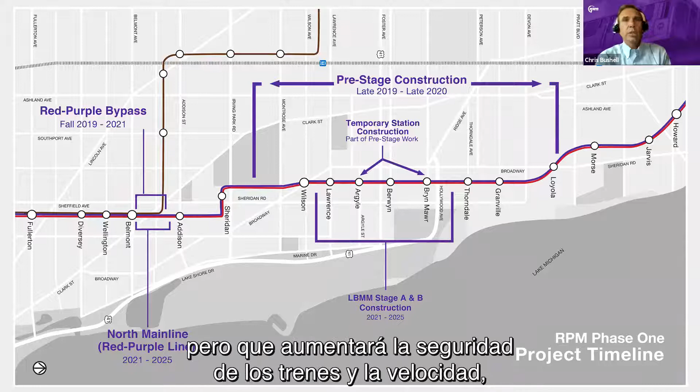Next slide please. So just a map. Most of you folks have seen this already, you understand what it is. Besides those two elements and the stuff that goes around them, the bypass obviously comes with some additional replacement of the elevated structure. In addition to that and the work I talked about in Lawrence to Bryn Mawr, it's also a new signaling system, which a lot of you will never see, except it will keep your trains safer and faster, and otherwise be a critical part of modernizing the service into the future.

Next, please. So, outreach, design, and construction. Outreach has started, it really started 10 years ago and continued through public meetings where we were looking for the neighborhood's vision, how the neighborhood was anticipating reacting to new stations and what was important in those. It continued through a National Environmental Policy Act, a NEPA study, and finally a full funding grant agreement. So the outreach has gone on for a long time. In the short term, it's really reaching out to businesses, reaching out to communities, providing the best information we can on construction.

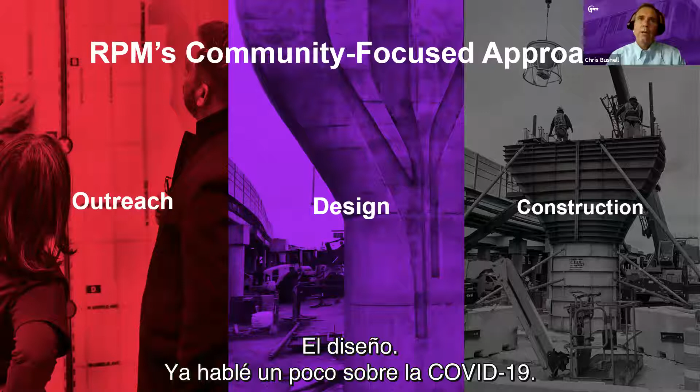Design, I talked a little bit about COVID. Design in this project is occurring all over North America. We have used video conferencing instead of people traveling to the city, which has some advantages and disadvantages, but we've been able to keep it going.

In terms of public space design, we haven't just considered the structural weights and the train and how many times the train has to go over and the various forces associated with that. We've also thought about the community as we've been building these bridges, what kind of rooms and spaces, public spaces, are created under our bridges and around it. So we have tried to give that consideration and provide fewer columns, better sight lines with those columns, safer for cars and pedestrians going through, as well as new lighting. So various amenities that you would expect to see in your city, we've tried to deliver on those as well.

Construction. We are building a very big project here, and it is right in the middle of your neighborhood. That said, we've tried to take into consideration and limited the contractor in terms of what they could take for roadways, closing those roadways. They can't close all of them at once. We work very closely with the aldermen to make sure that you can get to your homes, and where you can't, you have suitable alternative service. We make sure that when we close an alley, that you have garbage pickup. So we have considered the impacts of that construction, not just to keep it on schedule and on budget, but also to minimize the impacts to the community and the riding public.

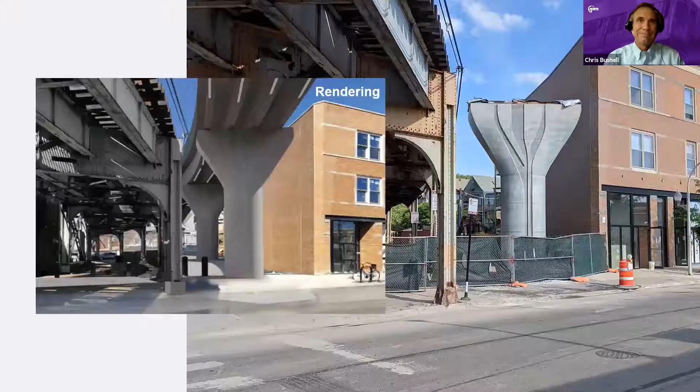Next slide, please. So this is just a couple of slides to show that we've delivered on some of the promises we made in earlier renderings. Those of you that are in the neighborhood, of course, see what the columns look like. You'll understand there's a bridge that will ultimately be on top of that—that's really the bypass. But just comparing those to what we showed earlier, we're trying to deliver on those promises.

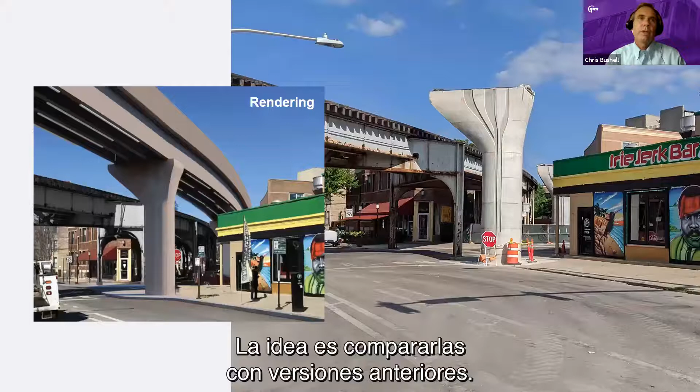Next. Similar issue here, just trying to compare it to earlier visions. You see a little bit of refinement one to the other, but fundamentally we're endeavoring to deliver on earlier promises. Next slide, please.

I talked about fewer columns. I talked about lighting, better sight lines. All of these are improvements that we considered in a room like this. Instead of just having tracks under there with nothing else, we tried to improve the lighting and add features where we could, where it made sense to, both for the community as well as for the structure we were building. Next, please.

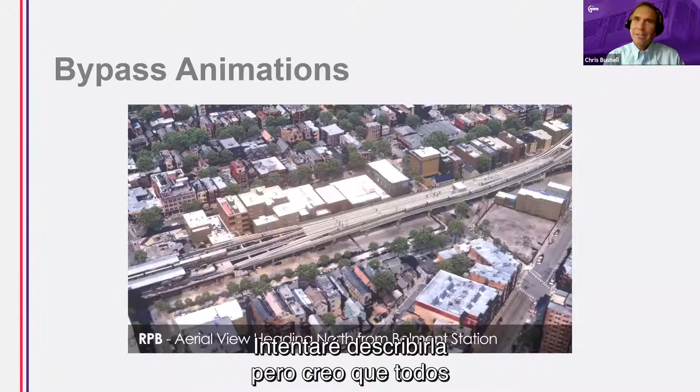So I'm pleased to say we did an animation a couple of years ago. It was a very preliminary design. Ultimately, the contractor has done a ton of hard work to take it to the next level, and I'm pleased to show it today. I'll try to narrate it, but it should be pretty clear to everyone that I'm not much of a talking head, so I'll do my best. But if we could start the animation now, that would be great.

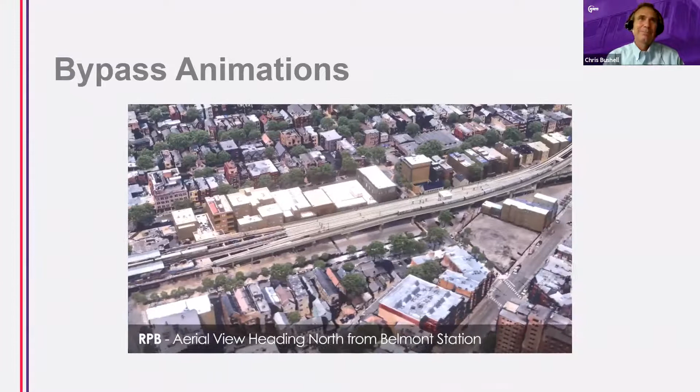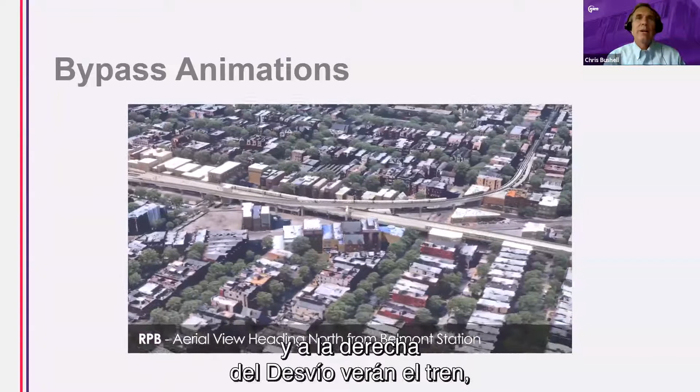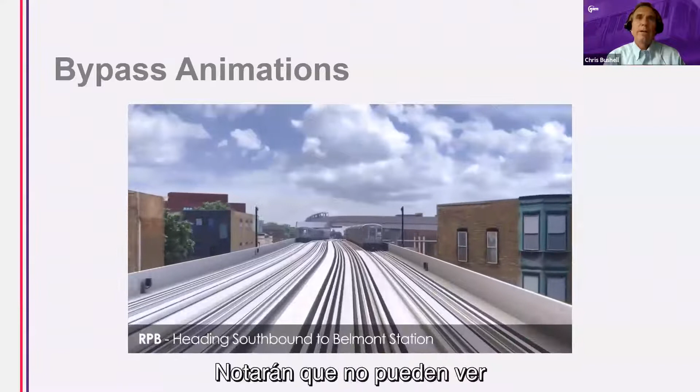All right, so you've got an overview here of the bypass. To the right of the bypass is that train, the Brown Line train continuing northbound. You can see that we're also reconstructing the other tracks. You'll notice that you don't see through these tracks - there's a closed deck, so you've got a Brown Line going over the top and Red Line going underneath it.

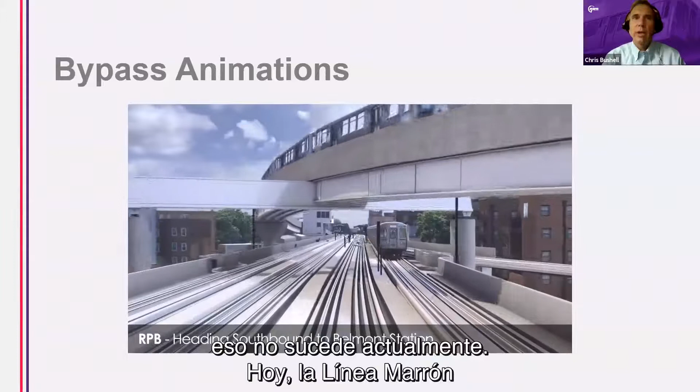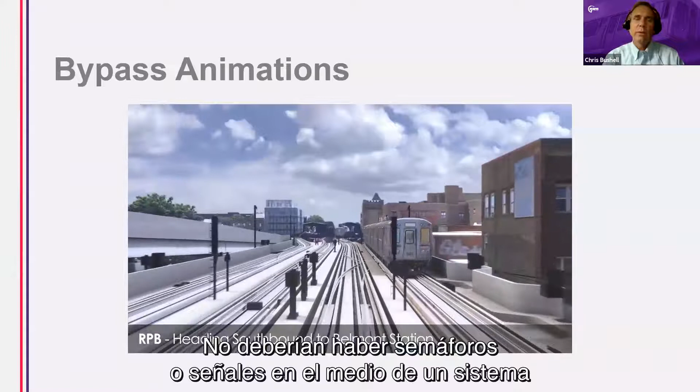And that's an important thing. That wouldn't be happening right now - right now the Brown Line or the Red Line train would have to stop. You don't see stoplights in the middle of the Dan Ryan Expressway, and you shouldn't see stoplights or signals in the middle of a busy modern transit system. So that's really the reason behind that bypass.

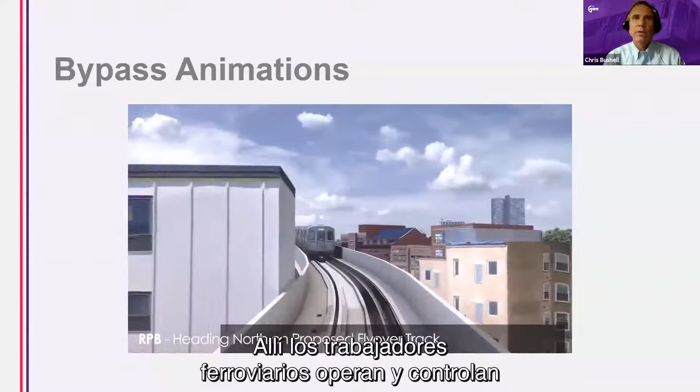Another view of the same. This is a northbound Brown Line train coming right to the side of our tower, where various rail people work and control the trains moving through this junction. Red Line going underneath it - again, Red Line not stopping, just continuing to go.

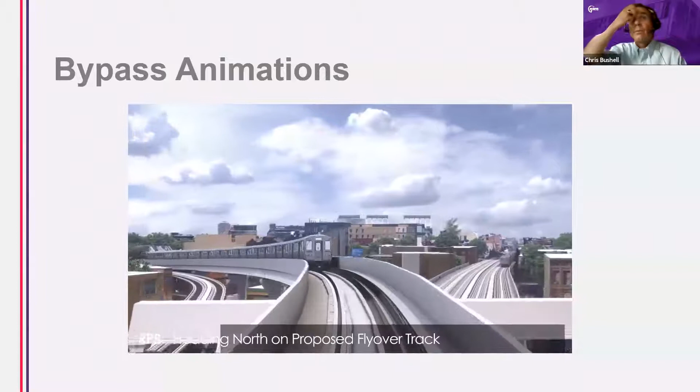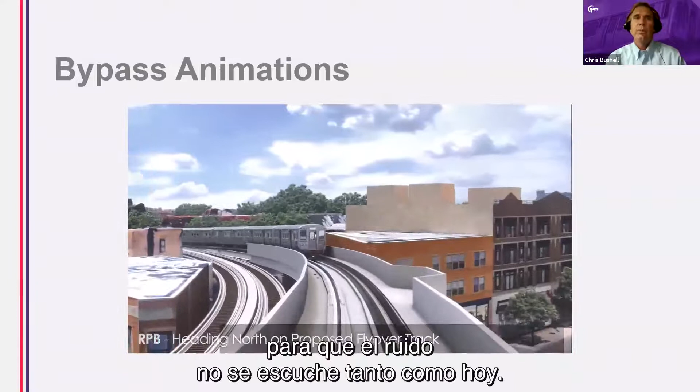These are really the basics of the structural improvements that we're doing. You'll notice sound walls, and you'll notice that it's a closed bridge structure, so the noise doesn't punch through and go down nearly as much as it does today.

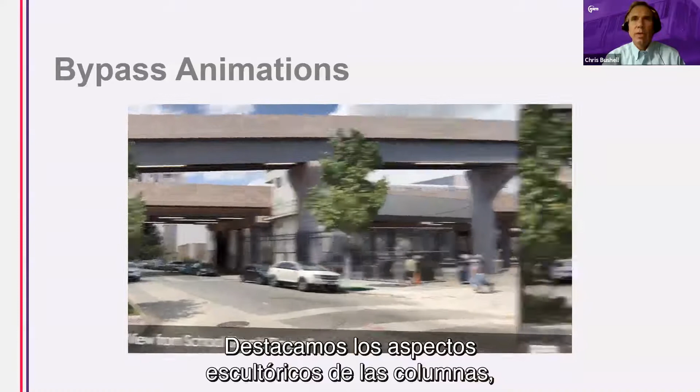I talked a little bit in design about public spaces and rooms. So this is a little bit more of an illustration of how these rooms worked for us, where we emphasized the sculptural aspects of these columns, as well as provided additional lighting and fencing, other things to kind of more delineate that space as either a neighborhood space or, in the case of Clark here, more of a commercial space on a larger scale.

And then, moving to a room that's a little bit of both at Clark and Roscoe, there with the vision over the top of it.

The bypass is about that bridge, that bypass. It's also about constructing the bridge underneath it, which really aids in the throughput of all the tracks.

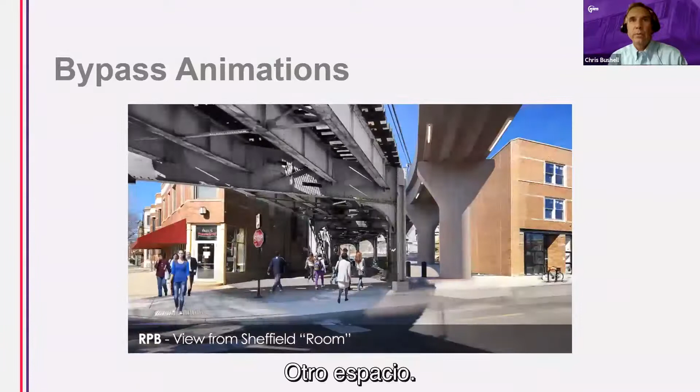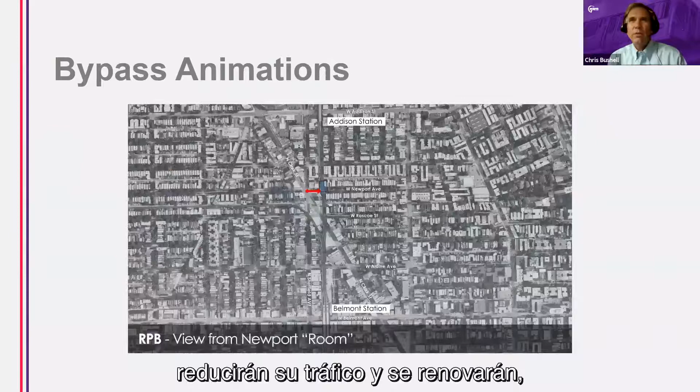Another room, again, a little closer at Sheffield - a little more of a neighborhood space. I'll remind folks that the existing tracks, while we'll use them less and they don't see as much traffic, they get renovated. They get painted and brought into a state of good repair.

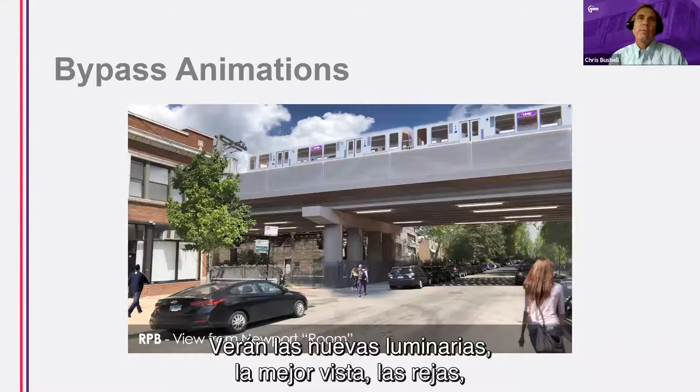The Newport room - this is really the four-track section of the Red and Purple Line that we're replacing. You can see the increased lighting, the better sight lines, the fencing, and some of the other amenities that we endeavored to think about in more of a neighborhood space.

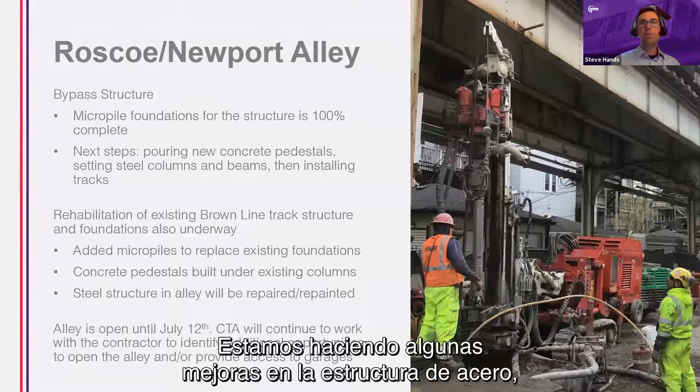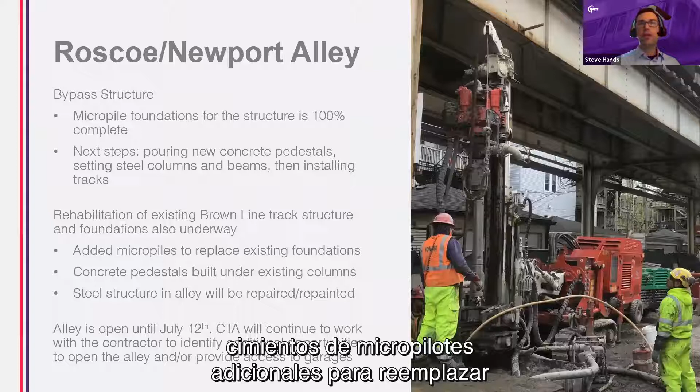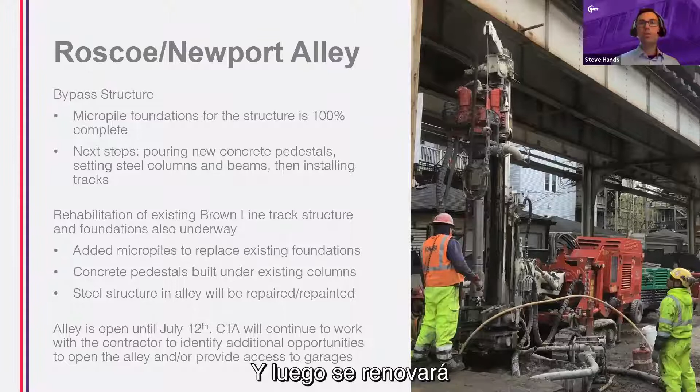In addition to the bypass structure in this alley, you can see the existing Brown Line track structure, and currently we are working on the rehabilitation aspects of that. We're working on improvements to the steel structure, shoring those existing columns, preparing for new foundations, additional micropile foundations to replace the 113-year-old foundations out there. New concrete pedestals will be added at the base of those columns after the columns are cut down, and then the entire steel structure will be rehabilitated, repaired, and repainted.

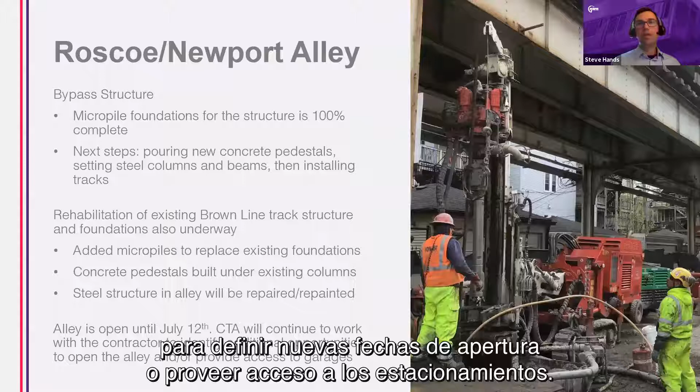We're happy that we were able to open up the alley. It's currently open and will be open through July 12th. And then we'll continue to work with Walsh Fluor, our contractor, to identify future opportunities to open up the alley or provide access to garages. Next slide, please.

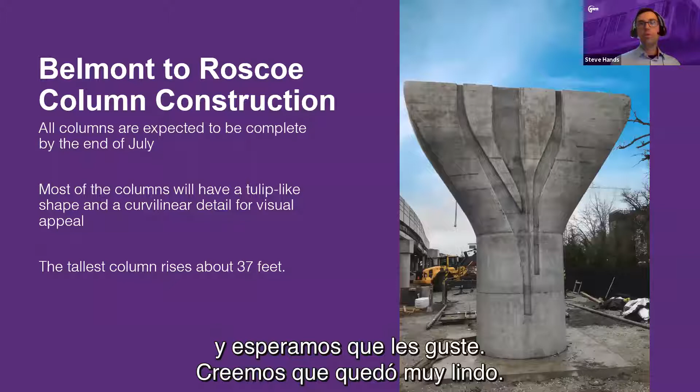Here are those columns marching from the existing Belmont Station as they increase in height gradually to support that bypass structure, rising up to a level that's about a 4-story building. Now that they're in the community, you see the highest columns are in place. You have a sense of what it looks like in the surrounding community, and you can see pretty clearly that while they are taller than the existing structures, they are within the same height as a lot of other buildings in the neighborhood, and we're really excited to see how they turned out.

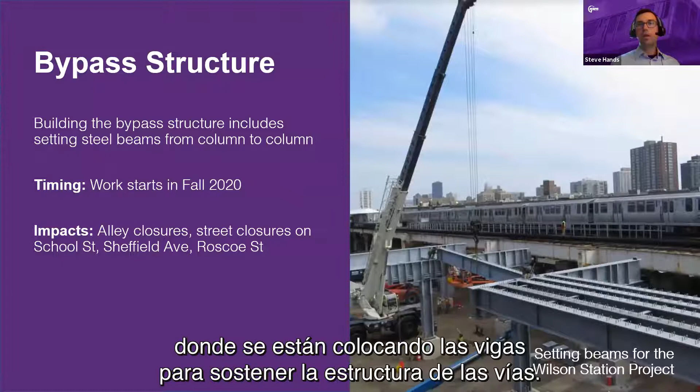Once all the bypass columns are complete, which we're looking at the end of this month for those to be complete, the next aspect will be to set the steel beams. You can see an image here from the Wilson Station project, where those steel beams are being set to support the track structure above. You can see the type of equipment here, a large crane, and the workers associated with setting those beams.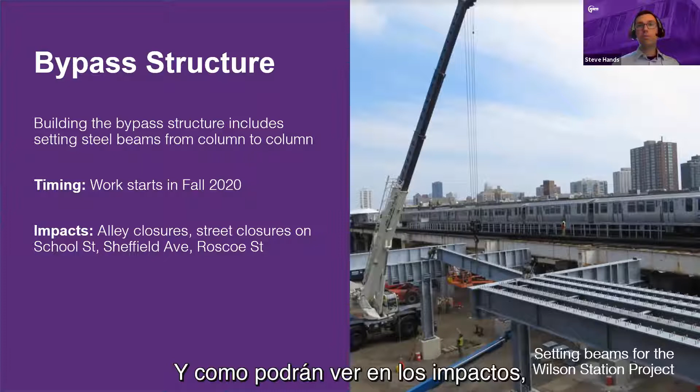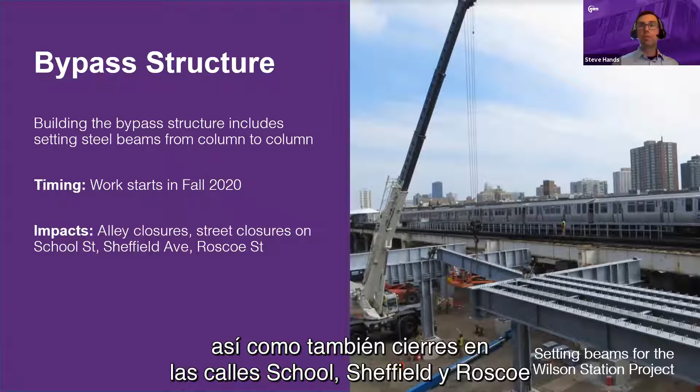This work is expected to start this fall. As you can see from the impacts here, where the work is being conducted, you will continue to see some alley closures where those beams are being set, as well as street closures at School, Sheffield, and Roscoe, where the bypass structure crosses.

In addition to the bypass structure, we'll also be working on a temporary track structure this fall. The temporary track is necessary for us to continue to operate Brown Line southbound service while we reconstruct the Red and Purple Line tracks adjacent. This work is expected to start in the fall, and the impacts are really localized to those individuals along Sheffield between Belmont and Roscoe Street on the east side of Sheffield, those businesses and residences.

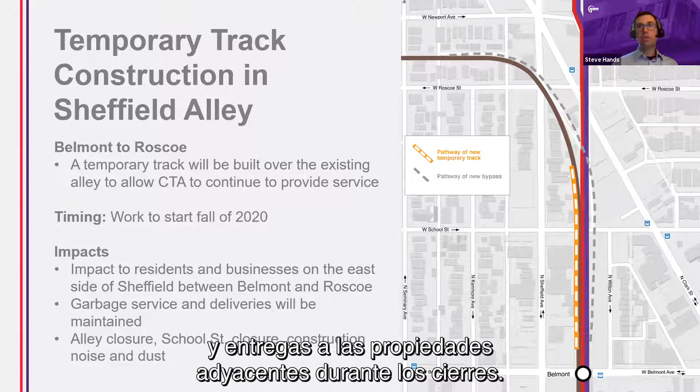Because the temp track has to be located right above the alley, there will be alley closures, as well as closures at School Street where the temp track crosses. However, our contractor will continue to provide garbage service and deliveries to those adjacent properties during those closures. Next slide, please.

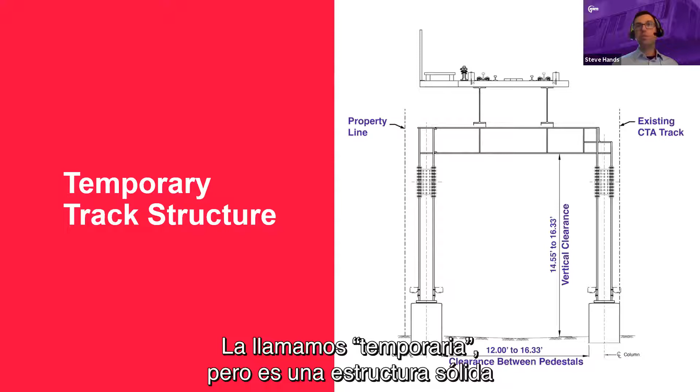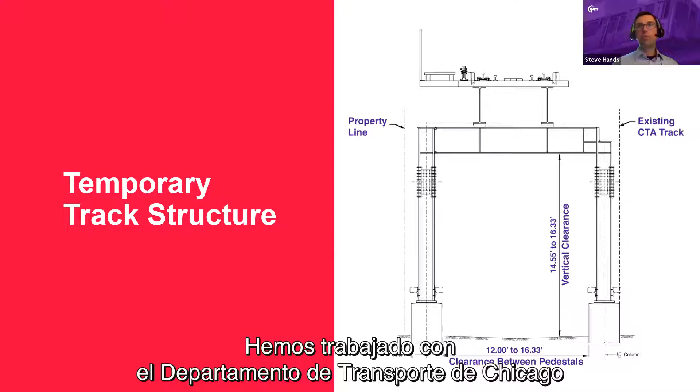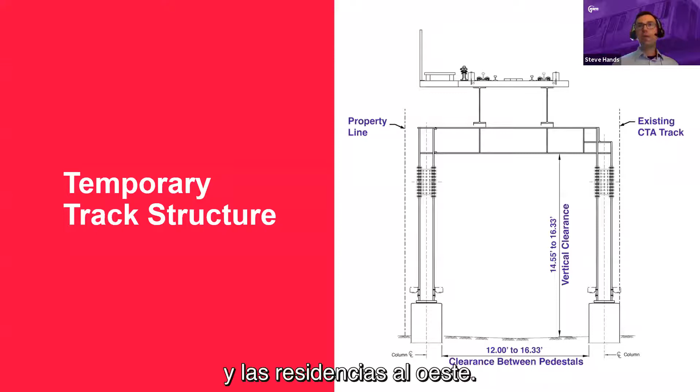This is a drawing from the designer for the temporary track. We call it temporary, but it's still a very robust structure to support the existing Brown Line track service. It will be built over the alley, and you can see the drive aisle is between those two columns, but it will be wide enough to accommodate vehicles to traverse. We've worked with the Chicago Department of Transportation to make sure that this design will function well. It provides at least 12 feet between those concrete pedestals at the base of the columns, and you can see it's right over the alley between the existing CTA tracks to the east and the properties to the west.

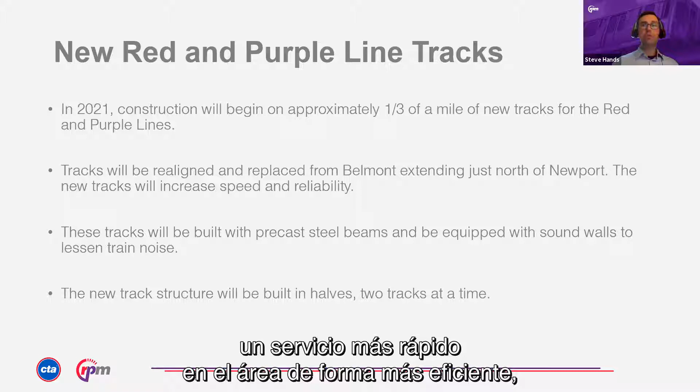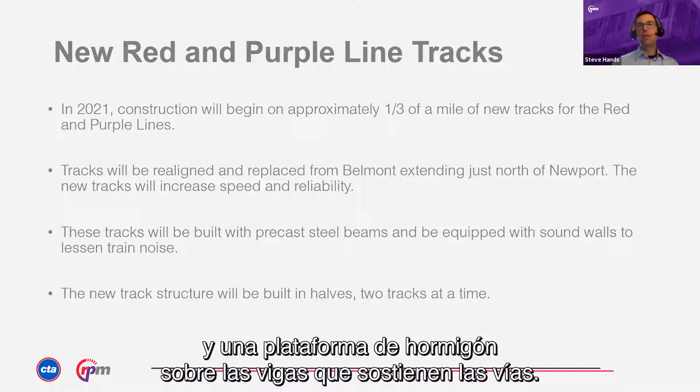Once the bypass structure and the temporary track are in place, we'll be able to work on the new Red and Purple Lines between Belmont and Newport. This is a full replacement of those 4 tracks. We'll build the structure in halves, 2 tracks at a time, so we can continue running red and purple line service while rebuilding the other tracks. The tracks will be realigned for faster, more efficient service and improved customer comfort. They'll include sound walls and a concrete deck above the beams, using a mix of concrete and steel beams to support the track structure.

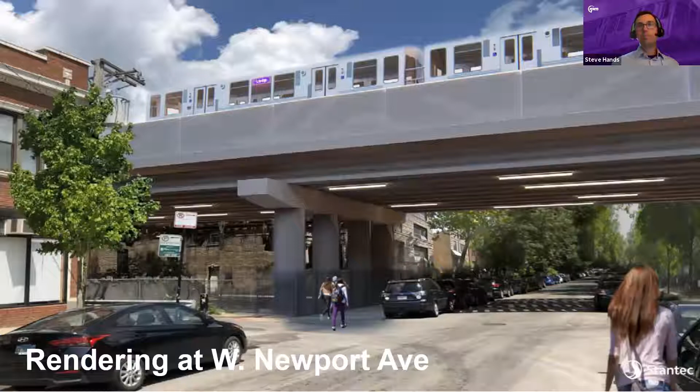You saw this rendering earlier in the video. This is the Newport area, showing the 4-track section of the red and purple lines as they cross Newport Avenue, just east of Clark Street. You'll see the structure with the closed deck, the sound barrier, and the lighting and detailing on the columns that improve the aesthetic approach of this structure as it winds through the neighborhood.